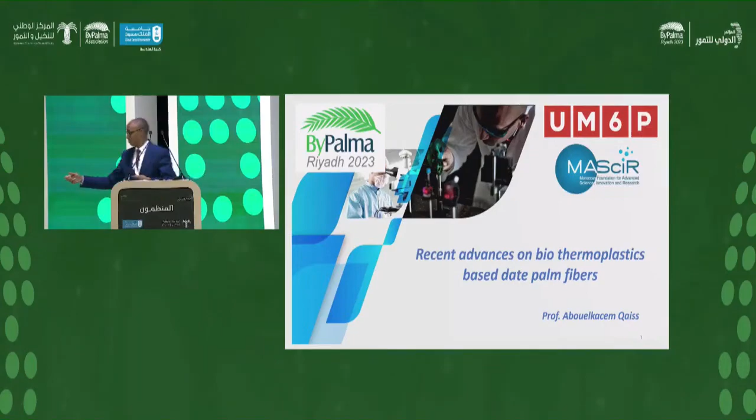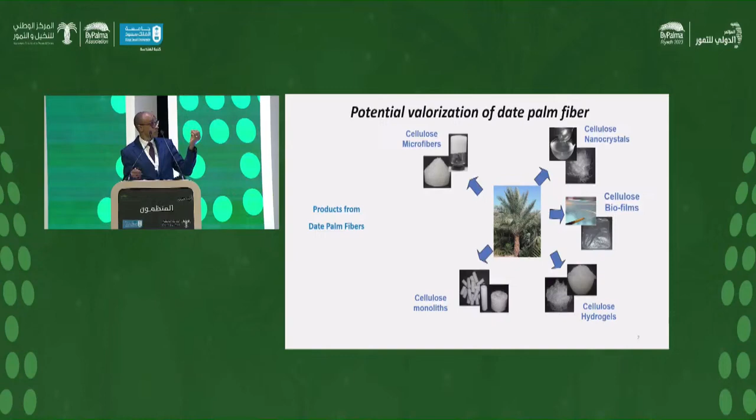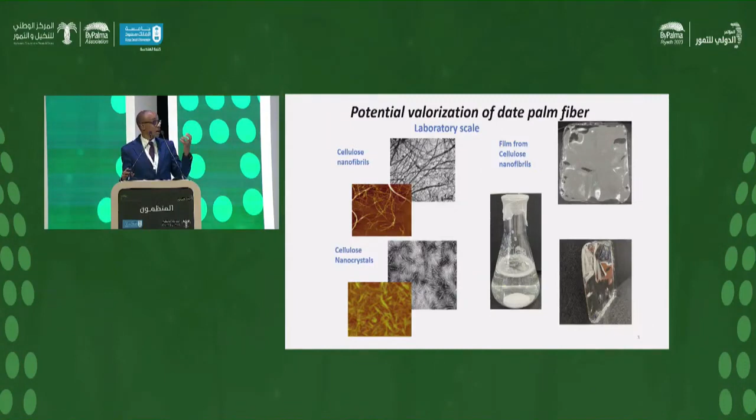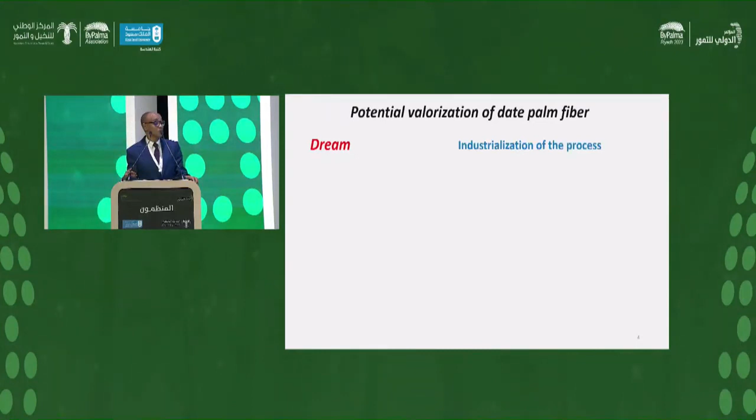In my laboratory, I have several works on natural fiber and date palm fiber to extract, for example, cellulose microfibrils, cellulose nanocrystals, and cellulose monoliths. These can have several applications and treatments because they offer a lot of surface area, for example for wastewater treatment, to extract specific waste products and components in water, and also for cellulose hydrogels. As an application, we manufacture film as 100% cellulose. At laboratory scale, we can use a solution, like a viscose product, to produce a film, but nowadays it's used at laboratory scale by evaporation of solvents. In this case, we use water to obtain a transparent film - like a plastic film, with the same transparency. But production at industrial scale is still under study, and our dream as researchers is the industrialization of this approach.

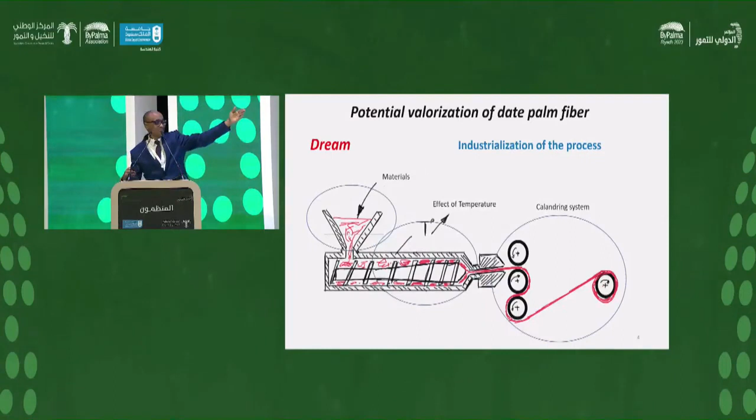In our lab, we have an extruder. In this extruder, we have three parts: the feeding of materials, the transformation state of the materials - here we use the thermal effect of temperature to change the state of the material - and the compounding section, to obtain the composites or granular composites between matrix and reinforcements. That is our dream: one day, we feed in cellulose, and we obtain a film industrially, for industrial applications.

Here we have the definition. To apply this, the material must have a thermoplastic behavior. What is thermoplastic behavior? It's when we have a material, and under temperature, it changes state. This is usual - we talk about, for example, PP, polypropylene, or polyethylene. We have several properties similar to what we obtain when we produce film from cellulose: transparency, acceptable mechanical properties, and barrier properties, especially when used in packaging.

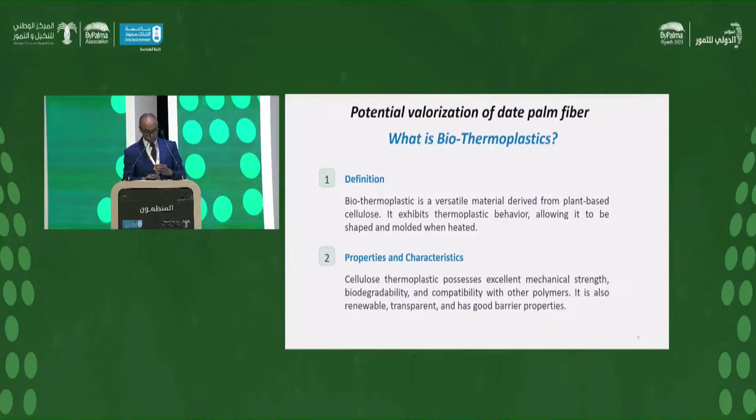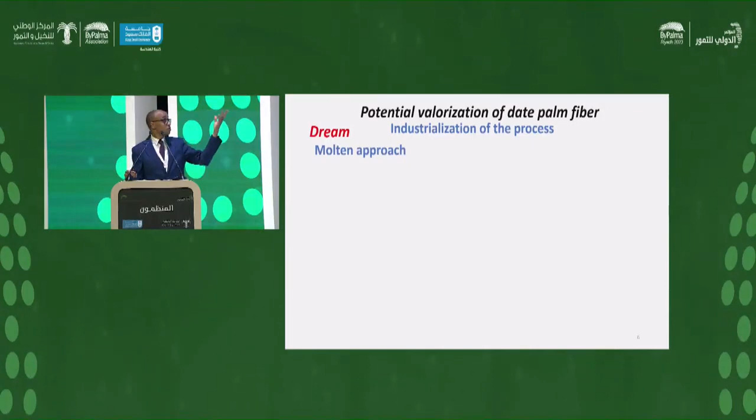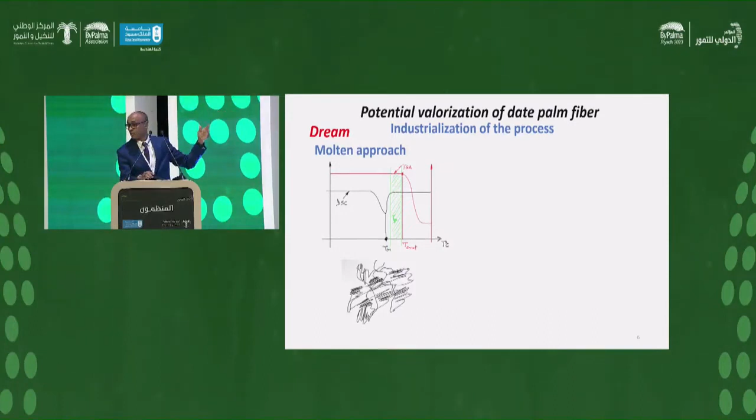To reach these, I will talk about two approaches. The molten approach: for example, for thermoplastic or semi-crystalline polymer, we have thermal properties. These thermal properties allow displacement between the chains. Under temperature, it facilitates this. We have the onset degradation of the material, and the process temperature is chosen between these two temperatures. We choose a temperature higher than the thermal molten temperature to reduce viscosity. That's the approach when we use standard thermoplastic.

In the case of cellulose, we have the same shape: a linear chain, with intermolecular hydrogen bonds. It's a weak bond. Under temperature, we have degradation of the bond inside the linear chain before the intermolecular displacement. We can ask: is the intermolecular bond weaker than the bond inside the linear chain? We have a 3D cross-linked structure, and it's difficult because the density of the hydrogen bonds is much higher than the density of the bonds inside the chain. That's why we have degradation - the onset degradation occurs before displacement of the linear chain. So we cannot use the molten approach, because the material degrades.

In several works, we try to use natural fiber as reinforcement in thermoplastic composites, using standard industrial techniques like extrusion or injection molding. We can reach more than 20% natural fiber content to produce a composite by extrusion. But the problem is the change of color, which we don't talk about enough. This means we have degradation of the natural fibers. We can improve adhesion at the interface through different functionalization techniques, or development of a new molecule to bridge the matrix and reinforcement, but we still have degradation and the color change of the material.

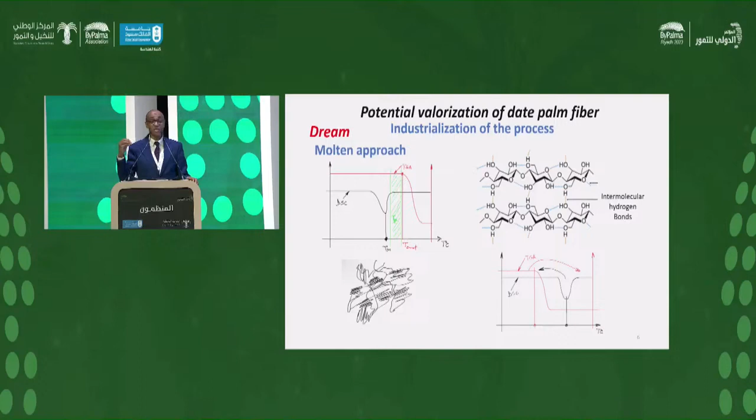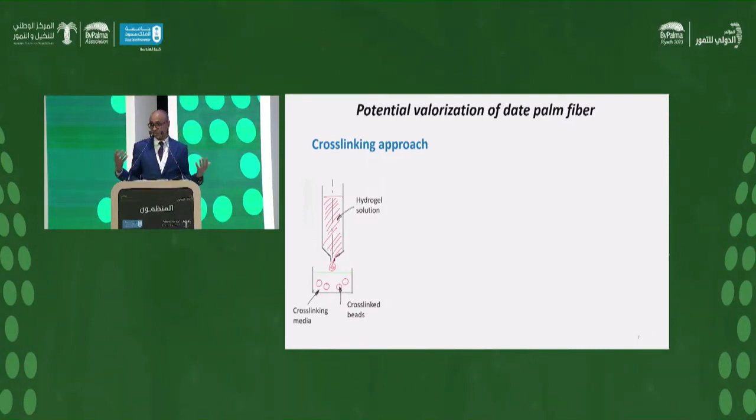The second approach is cross-linking. When we produce beads from hydrogel, we have the cross-linking media, and we have the bead before cross-linking. The size depends on the surface tension and the configuration of the system. We can obtain the cross-linked bead, which can also be used for different treatments, because we have ultra porous materials.

This is the same approach used, for example, for chitosan and black carbon for specific uses, to obtain the bead. This bead can be used for absorption of specific components - for example, extraction of cadmium from phosphate. As you know, Morocco is the top exporter of phosphate, and Moroccan phosphate contains more than 60 ppm of cadmium, which we must extract.

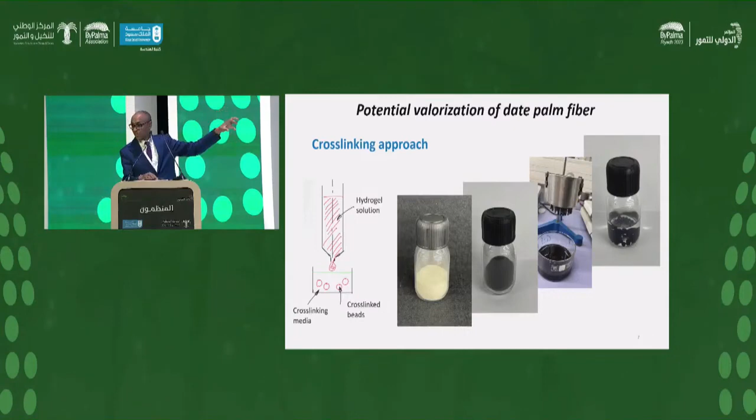Here we have a process used in textiles to obtain rayon from cellulose. We use the same approach for the treatment and cross-linking of the material, feeding with viscose solution. And we ask: how can we produce the viscose solution from our products or from natural fibers?

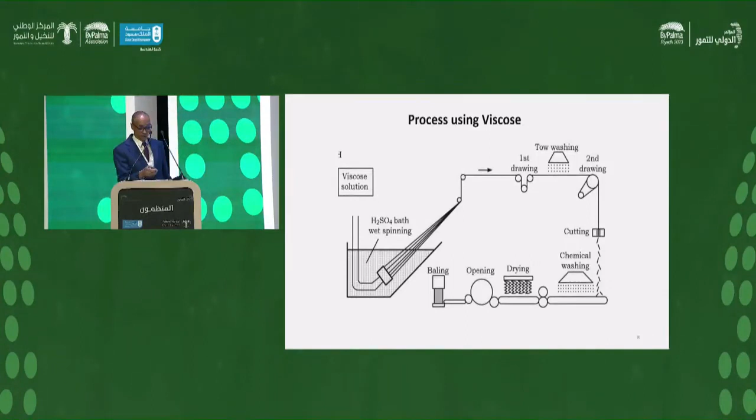Different steps of treatment we will follow with our raw materials. Our objective is to obtain viscose material which can feed the process to obtain a cross-linked, continuous production for the cellulose.

Our raw material in this case is the pulp of cellulose, used for example - as presented yesterday - to produce paper. This is the microfiber with specific length. We use this for the first step, called steeping. We saturate the material with sodium hydroxide. Before obtaining the pulp for paper, sodium hydroxide is used to extract the lignin. Now we use it to saturate the material and obtain a gel configuration or structure of material as viscose material - this is called soda cellulose.

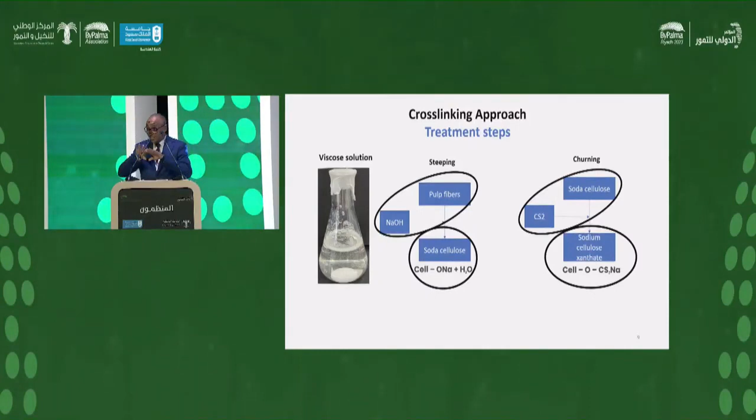After that, we use carbon disulfide to open the link and create a more functional group, to be treated and cross-linked when in contact with the cross-linking media. We obtain soda cellulose, or sodium cellulose xanthate.

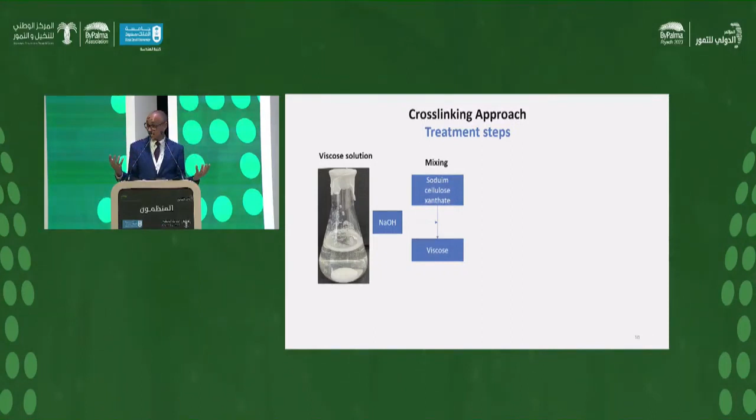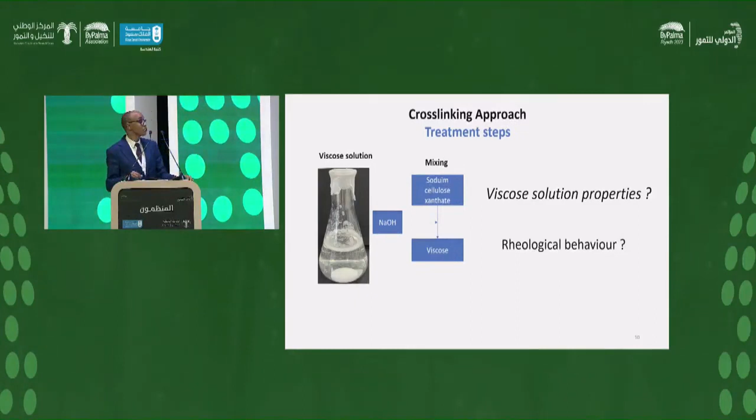These viscose materials must have specific properties, especially rheological properties, because we will use them in the extruder or a process similar to extruder, like what we use for example with polymer. When we talk about the grade of polymer, it's for extruder, extrusion, or injection molding.

This depends on the length of the molecule, and we do some characterization. Rheological, for example, plate at melting state, or we use the MFI, melt flow index. It gives us properties on how the materials must flow under specific conditions.

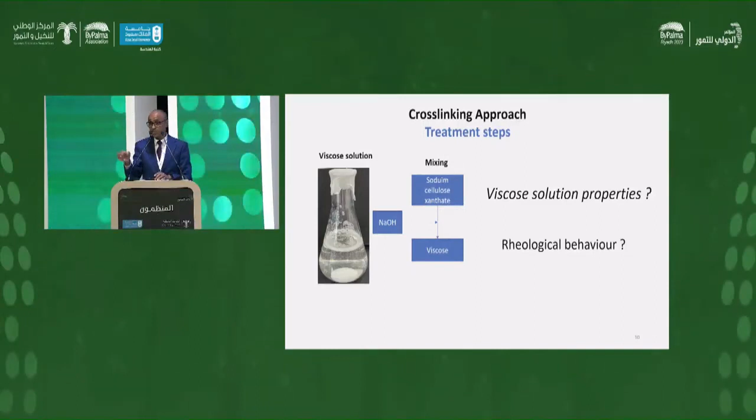For rheological behavior, we have different kinds, but the main character that our viscose must respond to is thixotropic nature. This means that the material has different viscosity depending on the shear rate. At high shear rate, we have low viscosity, and at small shear rate, we have high viscosity.

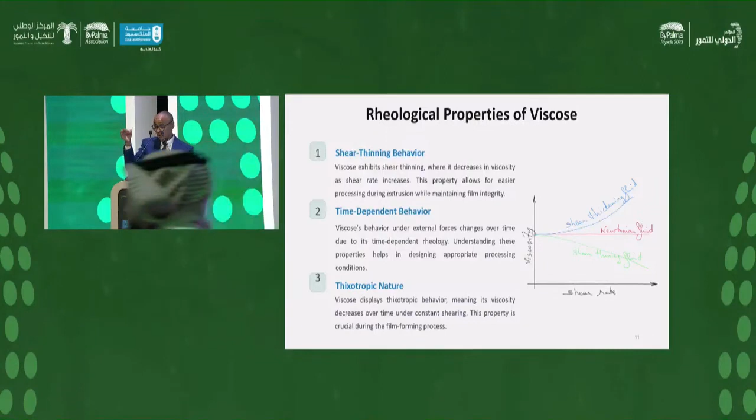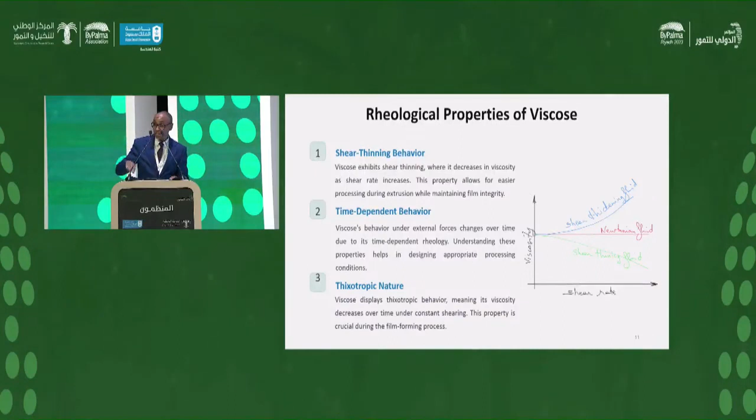This allows us to have the right flow of the materials with high viscosity, and we have enough time to treat the material inside the cross-linking solution. That is the horizontal extruder.

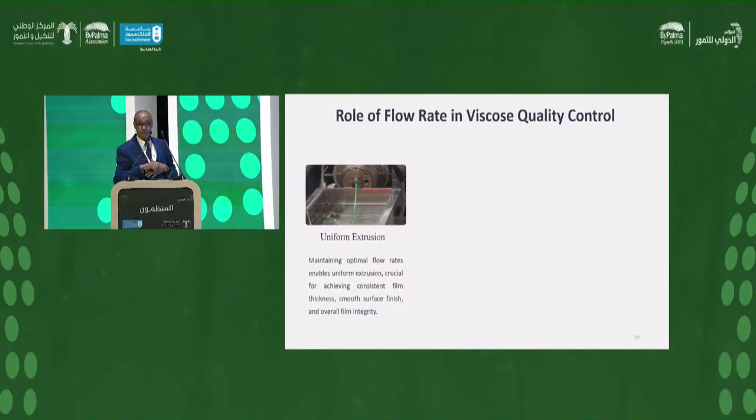But in our case, it is difficult to use this process, and we can use a vertical flow of the materials. This is a schematic of how the process can be designed and can be worked. This is a discontinuous process: we have the quantity of materials pushed through a die, this flat die to have a film, and we have a regenerating media of cellulose.

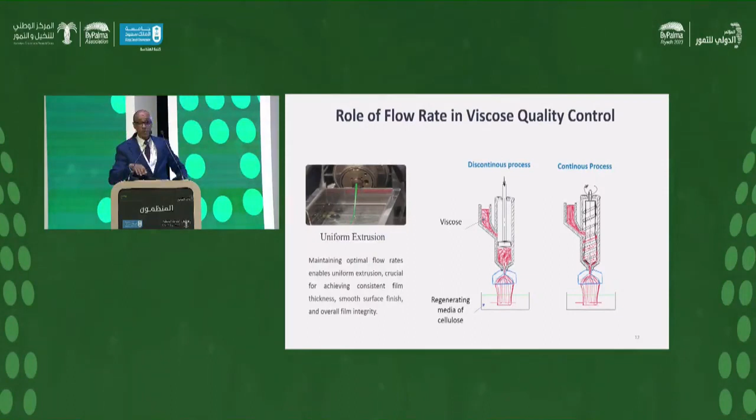And also we can use a system as extruder. We have the screw and the material flows through, and we can have a continuous flow of the material and continuous process.

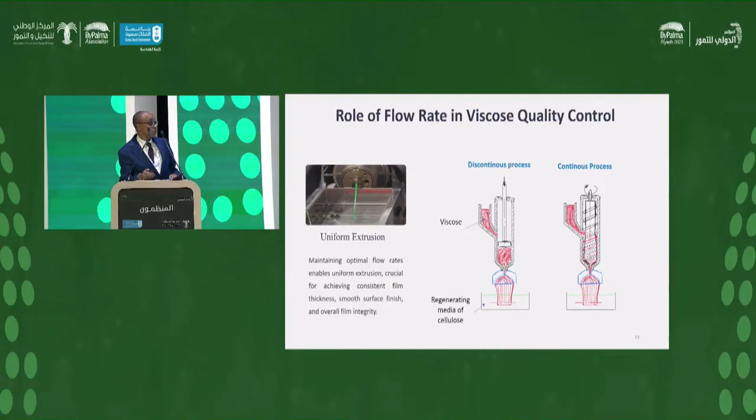Now I will talk about the regenerating media in this process. Here in our laboratory, we work on the transformation of an injection molding machine, which is vertical and has low pressure, because here we have a screw as extruder that transports the materials through the die.

And for the regenerating batch or regeneration media, we have a specific time of treatment. It is for that the material follows this path, and after that we have the material. We need just washing and drying the material to obtain a film of cellulose.

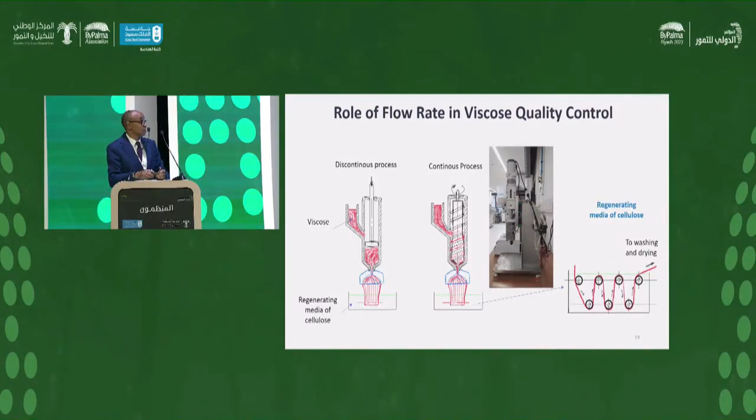For this we use sulfuric acid. We have sodium cellulose xanthate going in, and coming out we have the material, our cellulose, and after washing we have just a film of cellulose.

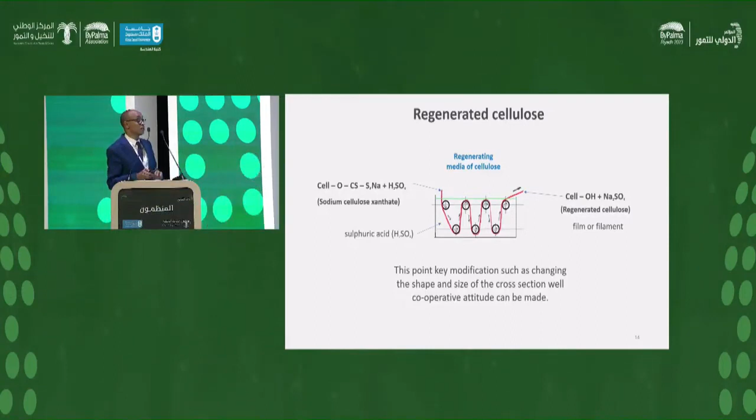And I will talk about the main point, which is the viscosity and rheological behavior of the material. This is the process which is actually used to produce thin rayon from cellulose. We have exactly the same approach to obtain the viscose solution.

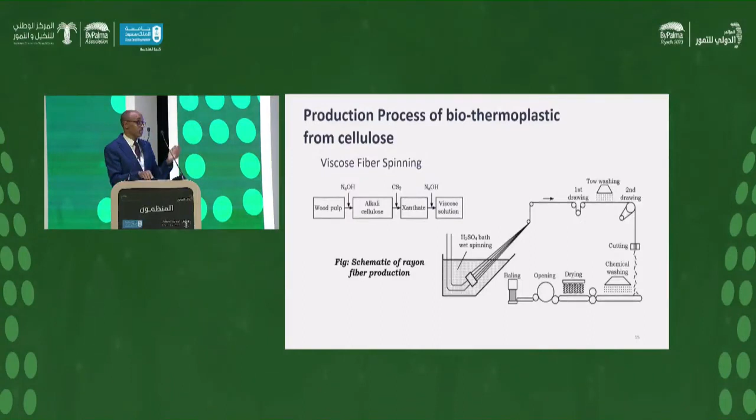The difference is that in the case of rayon, we have more specific surface of treatment, and the time of treatment is very short. In the case of the film, we must have a thin film, and the duration of the treatment is very long.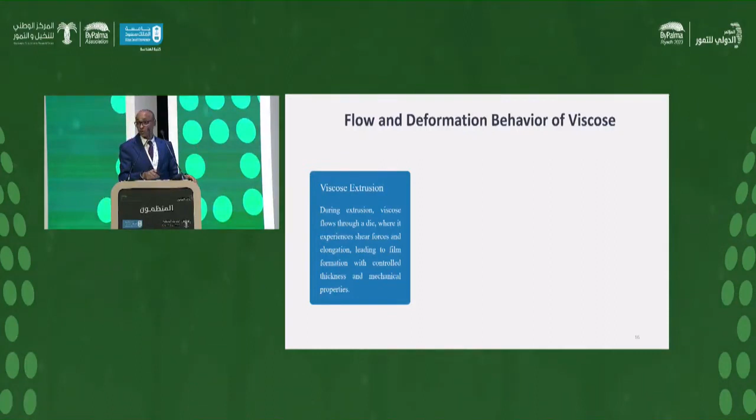Another use of the viscous materials, as I said, is extrusion. We can use the spin coater for coating, to deposit a surface coating for some functional application, or use the fiber and after that use the fabrics to produce specific parts. This approach is very much used in the textile industry.

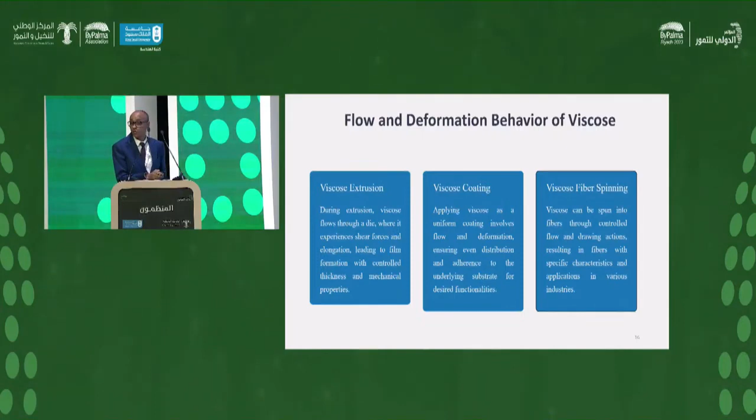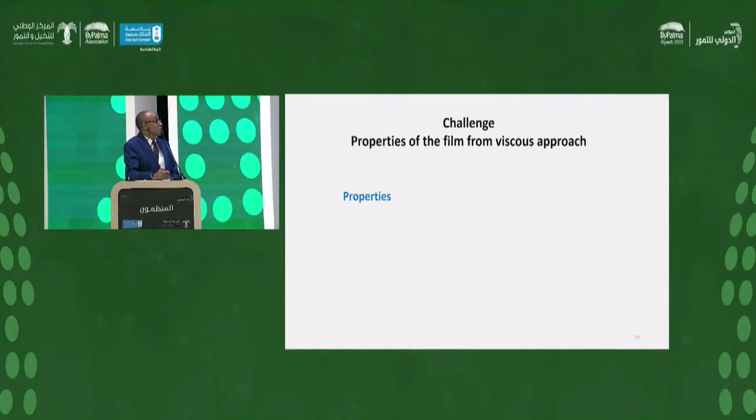Our challenge is to control the properties of the film. We can produce the film, but for application, we must respond to specific properties. Here I will talk about the ductility of the materials - the capability of the material to deform plastically before fracture. And we need this for application.

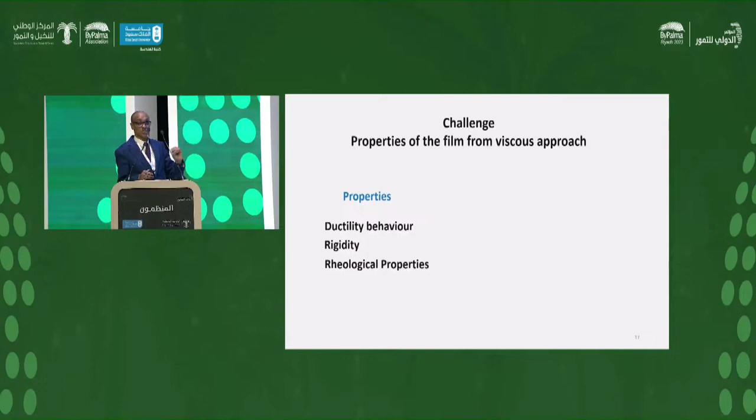When we talk about a film of cellulose, the first application is packaging. For packaging, we need some plastic deformation or thermoforming of the materials, and to control the rigidity, I will talk about this. Also for the process, we must have specific rheological properties, especially control of the thixotropic behavior of the materials.

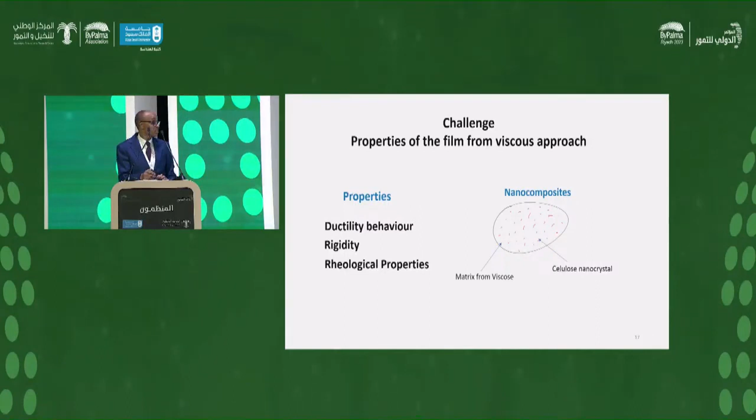And for the rigidity, we can talk about nanocomposites and use different nanoparticles to reinforce the matrix. For this, in our laboratory, we work on the synthesis of different nanoparticles: cellulose nanocrystals, graphene nanosheets and its derivatives through different states, carbon nanotubes, carbon nanofibers, metal oxides. These we need for specific applications.

For example, when we want to talk about the electrical conductivity of the film, we need to introduce specific particles like metal oxide nanoparticles, which can be used in small quantity, and we can respond to the specific application. Also the use of clay nanoparticles - in Morocco it's rich in bentonite in the north.

Of Morocco. That is why our first project, in my team, is to valorize Morocco's resources. We worked on different kinds of nanoparticles and the bentonite from the north of Morocco to produce nanoparticles.

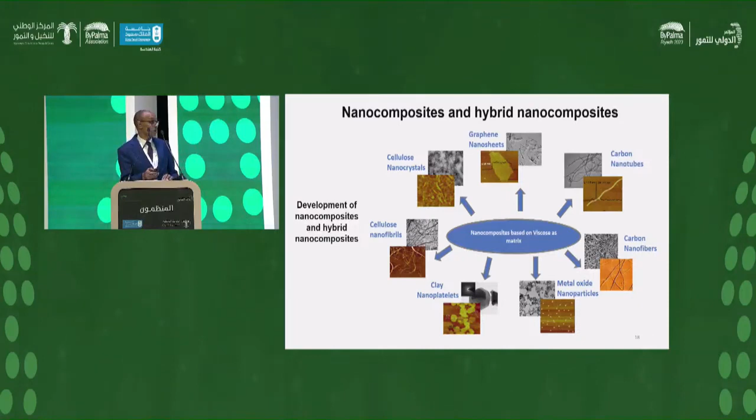And here we can produce the materials, and we as a researcher, we must respond to the specific application. Can we predict the behavior of the material before formulation? It is sure that when I mix two components, I will obtain the third one. But can I predict the behavior of the result of the mixture of products?

For that, it is very important to work on the modeling of the materials and to use the theoretical background, because we work on applied research, and we have the boundary between fundamentals and applied. We must use some fundamentals to produce materials with specific properties to control, for example, mechanical, thermal, rheological properties, and study, for example in the process, the orientation of the fiber along processing of the materials.

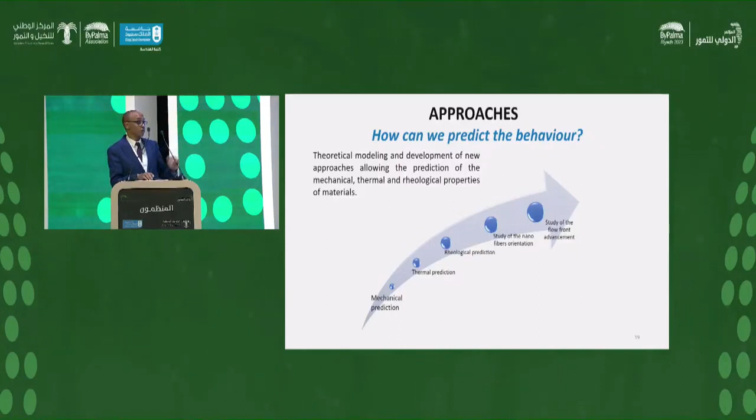And when we talk about the modeling, especially in mechanics, we base our modeling on mechanics of materials, which is based on two assumptions: the continuity of the matter and the continuity of the transformation. It means that when I take a volume at micro scale of the material, it is sure that inside this volume we have the material, all the components that describe the materials.

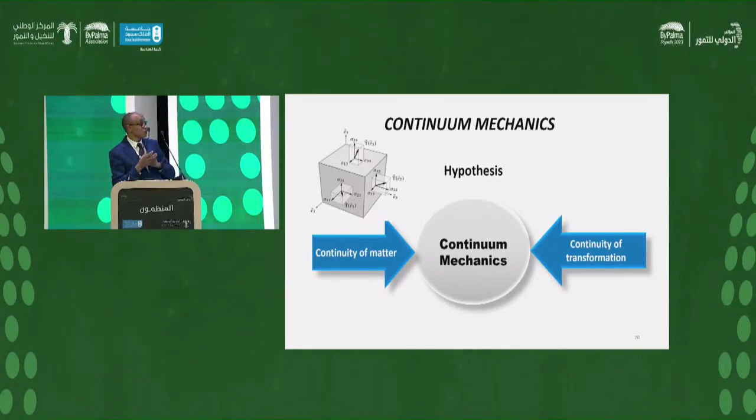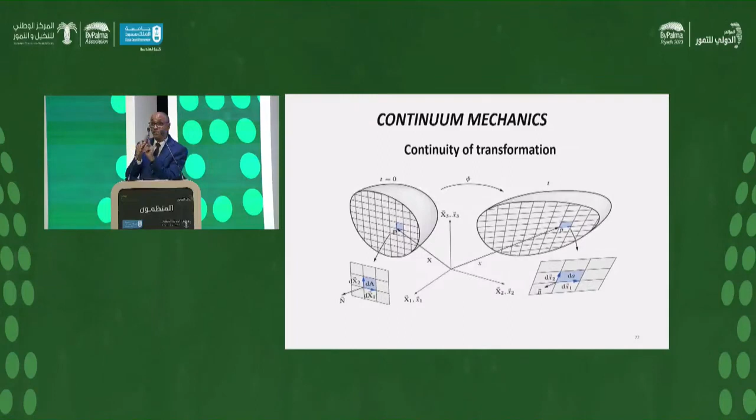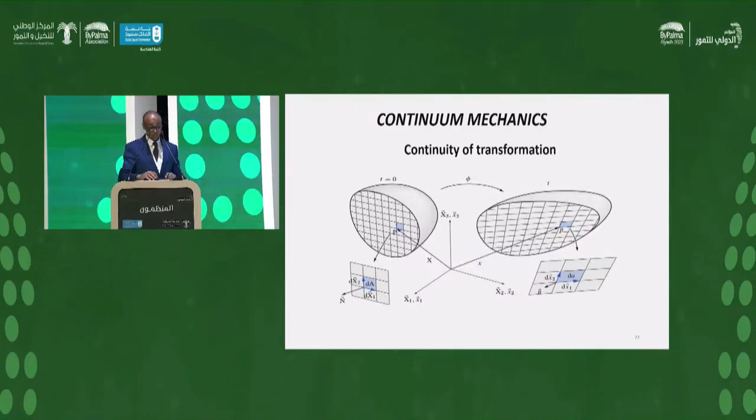And when we talk about the continuity of the transformation, it means that if we have two points, close together, after transformation or after deformation, we still have the two points close, and they deform. In this, I can talk of the matrix that describes the transformation of the materials. So we need, in continuum mechanics, to validate the two assumptions. That is a different formula.

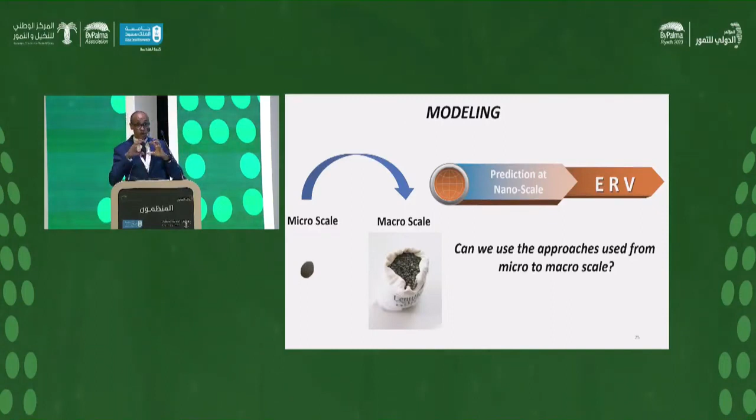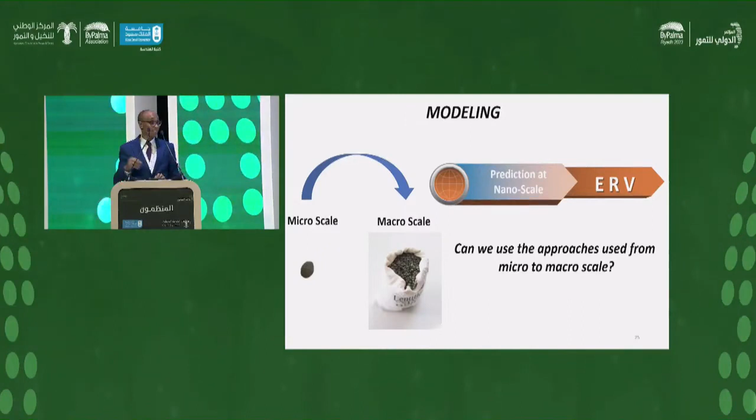And here, in our case, in the modeling, we can model at micro scale, and when we switch to macro scale, we use some formalism, and the properties of particles are different at the micro scale. The material is composed of different particles. And the question is: can we use this homogenization approach, based on continuum mechanics, to model the materials at nanoscale?

As I say, at nanoscale, we must model from nanoscale to microscale. I will take the elementary representative volume. And at nanoscale, when I take this volume, probably inside there is no material. So the first assumption, the continuity of the material, is not validated.

And the transformation, we talk about the transformation in continuum mechanics and infinitesimal displacement - this is at the nanoscale. In the case of nanocomposites or nanoparticles, we can have this deformation at nanoscale in the scale of the infinitesimal, and the second assumption is not validated. So we can see that all formalism from continuum mechanics cannot be used.

In this, we need the collaboration of physicists and chemists, because we need the modeling and description of the materials at atomic scale, at nanoscale, and we must model the link. It's for that, for example, when we talk about composite materials, we talk about the reinforcement and the matrix, and we cannot neglect the interface - we must take it as a third phase in our model.

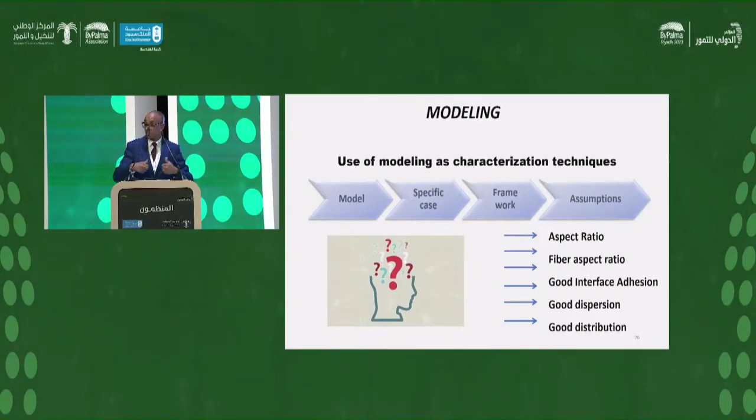And we must talk about the good dispersion and distribution. Both we have the adhesion at the interface, that's the first parameter, and the second parameter is the design of the processing equipment, how can the nanoparticle be dispersed and distributed inside the matrix.

In the future, it's sure that at the engineering scale, we must design the process responding to different states, and we must work on how we can use the film as in thermoforming. We cannot use the temperature, what is the equivalent, and can it give us the same result, and how can we use, and can we recycle these materials, and can we see the result?

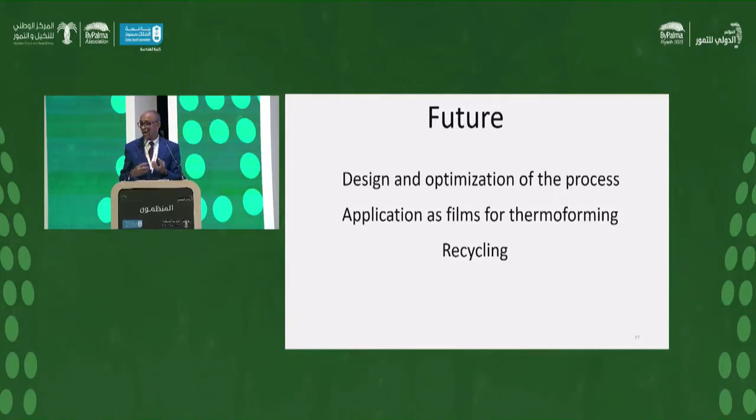The cellulose can be like a pulp of the paper and introduced. It's sure it's not the same, but it can be a first step to recycle the materials. Thank you very much.

Thank you, Prof. Qaiss, for taking the totally technical side, for more research on that, fundamental research, and towards how it can be fabricated into different types of products and characterizations and all these things. So now we open the floor for Q&A. Please, if anybody has questions. Is a student wanting to ask questions? Okay, with supervisor, okay.

Actually, Professor Qaiss, I'm his grandson, because he taught his son, and then I'm his grandson. Okay, so you are his student and then, yeah, grandson, okay.

Yeah, so I just want to challenge my grandfather with a simple question, because if we look carefully, us like in the Morocco region, I mean the whole MENA region, Middle East and North Africa, we have tight competition if we compare ourselves with Europe, because they have forests there. So they have unlimited supply. So to balance this with date palm, or let's say doom, how can we balance, or how can we compete with them, when we don't have enough supply?